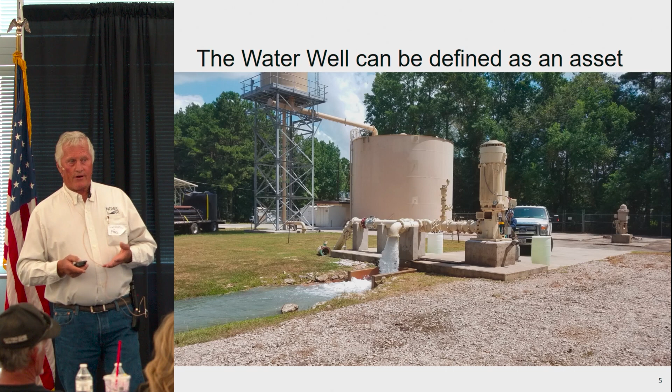So when we look at the water well, it can be defined as an asset, correct? The water well is an asset. But the aquifer it produces from is also an asset. Without the well, we can't get the water out of the ground, so the water has less value if we can't bring it out of the ground. So the groundwater is an asset, and the well is an asset.

Groundwater, a lot of people think it's there indefinitely. Wrong, it's not. But as long as there's water in the ground, we have groundwater. The well has a shorter life cycle than the groundwater in most cases, unless you're in the Ogallala. Then you can say the groundwater's probably got less of a life cycle than the well.

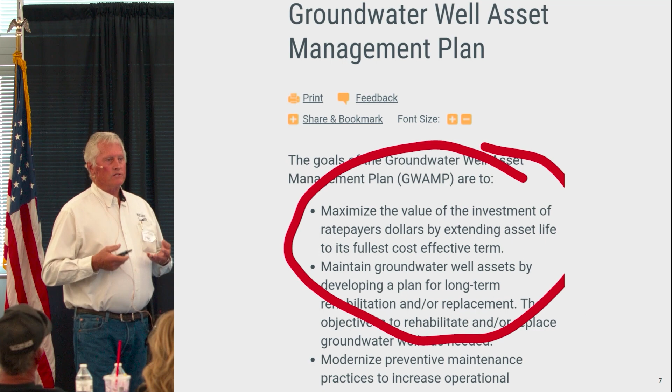But everybody's starting to see value in managing their groundwater. They used to not really manage it, they used to mine it. Today we're starting to try to manage it more than being a mining industry, pulling it out faster than we're putting it back in. We're starting to look at that because we know that once we run out of it, the communities will dry up. We have to maintain a long-term value to our constituents and for survival.

So to be a long-term groundwater asset, that involves much more than just installing a well. There's a lot of things that go into making that groundwater and the well a long-term value. One of them is the water quality. If we don't have good water quality, is the groundwater an asset? It might be there, but if it's not taken care of and the quality's bad, can we consider that a long-term asset? The answer is no.

What's that? I say dirty, it's wet. Yeah, it's wet, but it's not much of an asset.

A lot of times, it's things that we do that make that less valuable. If we contaminate that aquifer, it's less valuable than it used to be. So if it's naturally occurring, that's one thing we have to deal with. But we want to make sure that we don't degrade the value of that asset.

Also, we've got to look at the water quality or quantity. Is it abundantly sustainable? Is it replenished every time it rains? Or are we in a confined aquifer and are we lowering that water table? Are we using that water faster than we're putting it back in?

Most of the country, most of the world actually, has a declining water level. So we're pulling the water out faster than we're putting it back into our deeper aquifers.

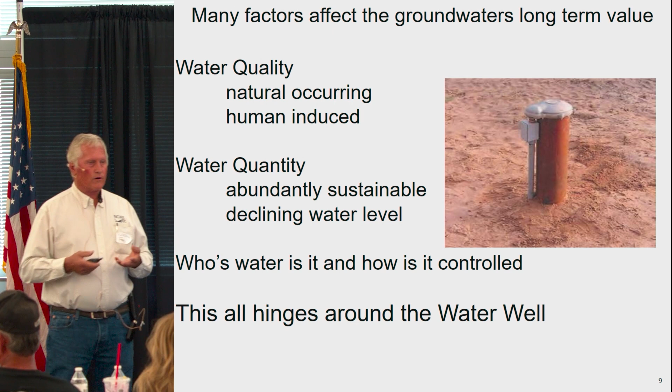But everything that we do with the groundwater hinges around the water well. Just about everything we do, either the water well or the injection well or surface contamination or something, but most of it's the water well.

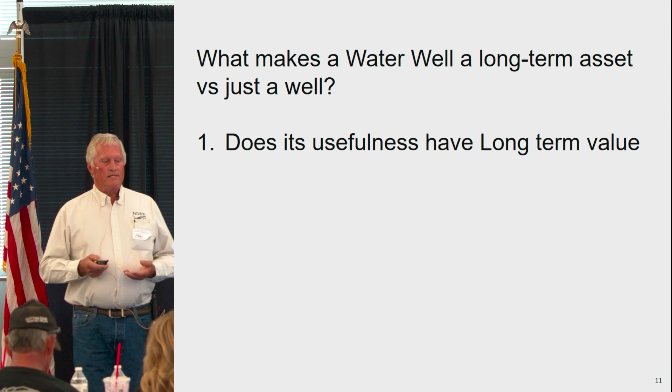So what makes a water well a long-term asset versus just a well? You drillers make it a long-term asset. You water well professionals make it a long-term asset. I like to say that it has to have usefulness that has a long-term value or a long lifespan.

And we should make every well like a Cadillac. Why would we make a well lesser than optimal? We want to make it like a Cadillac. We don't want to make it like the Yugo.

The Yugo was the worst car ever made, some people think. I don't know if it was, because I don't know every car that was made, but did you have a Yugo? No, I just wondered why it was worse. I never had one either. I don't know if you can even find a Yugo distributor in the United States, or if you could get it worked on very well, because there weren't very many sold, but you can't find one on the road hardly today. I know a few people had one, and the reason I know is because I gave this presentation in Colorado, my second presentation, and a guy stood up and said, 'My son drives a Yugo.' I'm like, oh, crap. But then he sent me a picture of it. That's his son's Yugo. He needs to take better care of it. No, he did take good care of it. It's still running, it still looks good. Yes, the Yugo cost less to buy, but what did it cost him to drive it? It wasn't an expensive car.

It was very inexpensive, almost like a throwaway type car, kind of like the Chevette, or... not the Mustang, take that back... the Edsel, or there was another one, Ford had one, the Pinto, yeah, the Pinto. It was kind of like them. You don't see them today. For 20 years, yeah, it was great. So, yeah, he had one. You can see almost everything on it's been fixed. I talked to another guy, he said, 'Yeah, we had one,' and he said it's readily available, obviously, the junkyard. When he closed the door, the handle came off - right after he got it, closed the door and the handle came off in his hand. So they were a cheap-made car.

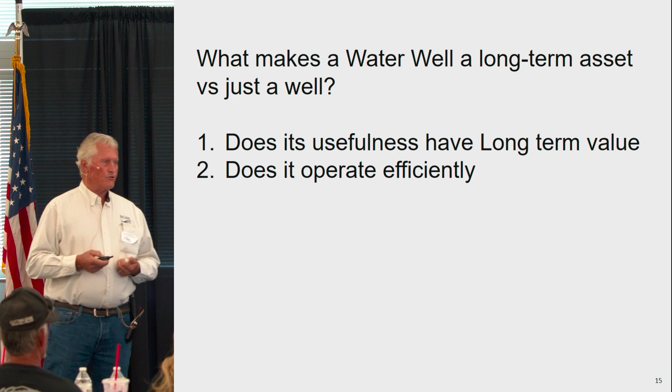To be a long-term asset, does it operate efficiently? Did the Yugo operate efficiently, or did he have to do maintenance on it more regularly than on a Cadillac? Does it require frequent service? Does your well require frequent service? You got it installed—does somebody have to go out there every couple of years and do something to it? Maybe it's plugging up, maybe the pump has issues. Or when you walk away, is it good for 5 or 10 years without anybody looking at it?

I know there's a lot of well owners that don't even know where their well is because it operates efficiently. We had a call one day where somebody wanted us to come out and look at their well because they had a problem with it. We went out, looked, couldn't find the well. Come to find out, they were on city water, and they were working on the system—that's why their well wasn't working. But they thought they had well water. Normally, we see it the other way around—people think they're on city water and end up being on well water and out of water. But this was the opposite.

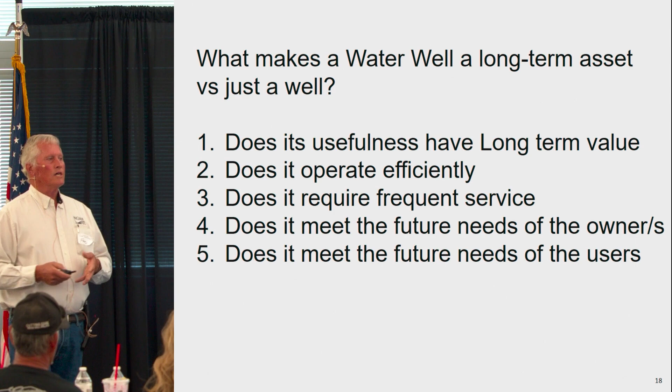Does it meet the future needs of the owners? Does your well meet the owner's needs? When he specified he wanted a well drilled, he probably told you why he wanted it, what it was going to be used for. So you build it to meet his needs. But then he's got to use that water to supply his customers. Does it meet the customer's needs? So again, does it have a long-term asset value to the user, not just the owner?

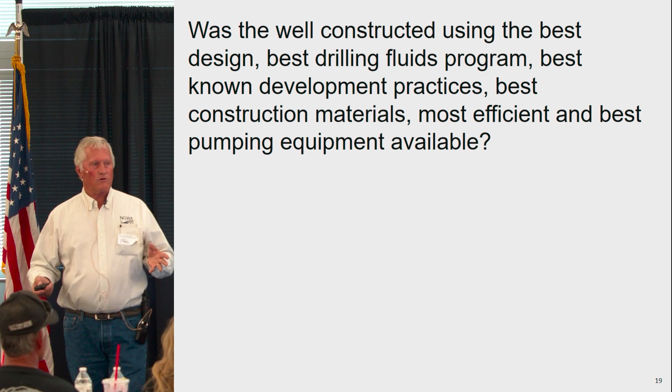Was the well constructed using the best design, the best drilling fluids program, the best known development practices, the best construction materials, the most efficient and best pumping equipment available? Did you use all that when you planned to construct your wells? Or was it constructed using a lower cost design because you're trying to save your customer money? We do that often, don't we—with questionable drilling fluids programs, or maybe no drilling fluids program at all. I was a drilling fluids engineer, so I look at that all the time. What are you doing with your drilling fluids program? Is it a good one, or are we plugging up the formation?

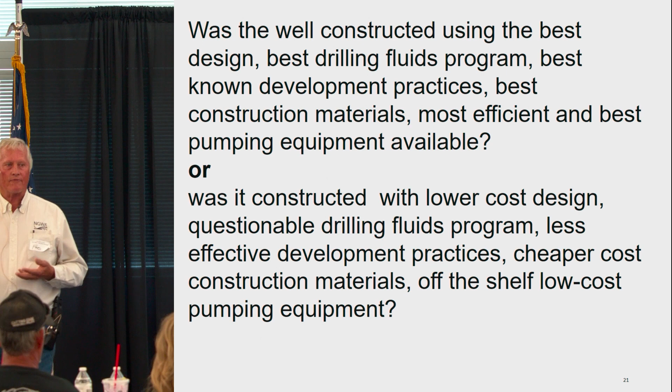Did you use less effective development practices, or are you just using one because that's the tool you have? Is it the right tool for the job? Are you looking at cheaper costs in construction materials? Maybe what you're using is cheaper than what somebody else is using, but you're putting it in because you're trying to keep the well cheap for your customer. Or using low-cost off-the-shelf pumping equipment from Home Depot or Tractor Supply that's not going to last as long as a Franklin Electric built motor and pump? Look at what you're using. Does it really make the best sense for long-term value? Is it going to last a long time, or are you building something that's going to require somebody to come out and repair it in a few years?

Where sacrifice is made—and this is what I said—sacrifices are made. Our company makes sacrifices. If something goes wrong on the well, we have to figure out what's the best solution for us and the owner. What's going to make the most sense in remedying a problem. A lot of times we have to sacrifice because they don't want to pay the extra cost involved to do something that you didn't know—you didn't expect it when you went in to drill the well.

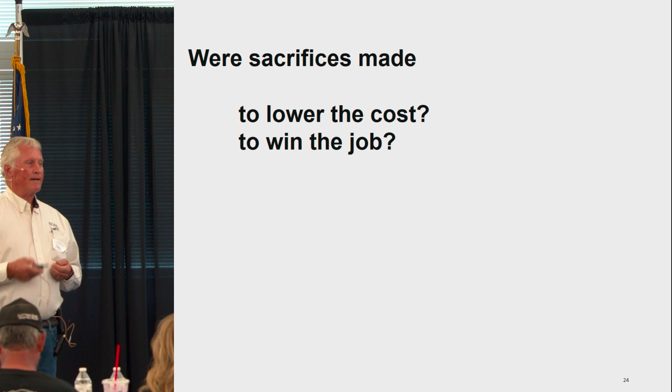There may not be any records you can use to know everything about what's going on, and you lose circulation or you hit a fracture or a fault. Something happens—did we do the best that we could? Normally we do the best we can with the materials we have and the money that's available. But is that going to give us that long-term value? A lot of times, to lower the cost, we want to do things that lower the cost for our customer. We want to do things to win the job. Can you guys go out and name the price you want to drill a well for, or do you have to be competitive?

Most of us have to be competitive. We bid a lot of our jobs. Most of our jobs are municipal type jobs, and almost every one of them is either bid or negotiated. And if you negotiate a job, you still have to be very competitive.

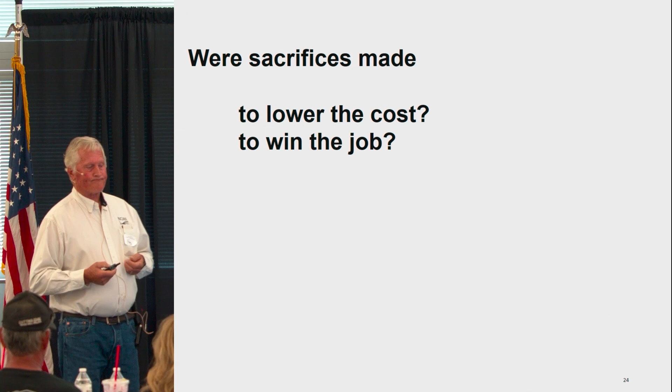Or are you hurrying to get to the next job because you're behind? Today, most of us are behind, so we're trying to get done to get to that next job because we have a commitment. We said we'll be there in 30 days, but this job's taking 60 to get done. We're trying to hurry up and get to the next job.

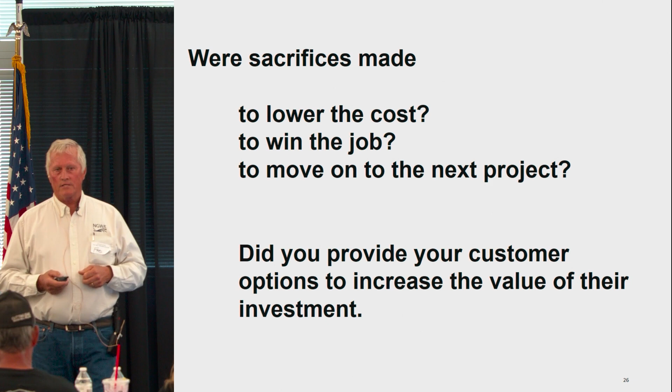Did you provide your customer with options to increase the value of their investment? Maybe the owner told you what he wanted, but for a little bit more, you could give him way more, quite a bit more. I don't want to use the word upselling because it's not really upselling, it's providing increased value. Did you talk to him about how he could increase the value of his well?

This is one of my pet peeves here. Can you hand me that blue book behind you? Most states, when we look at their rules and regs, let me see if I can do it with this one, I can do it with the pointer I guess. Now I gotta go back. There, that thing right there.

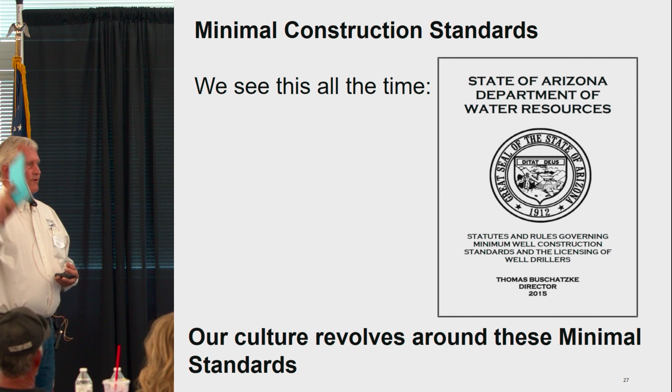Most states have minimum well standards. Minimum well construction standards is what is on the front page of their rule book, right? I'm looking at the state of Utah. It doesn't say minimum standard. Thankfully, it doesn't say that.

Because what are we teaching our kids? What are we teaching the young guys in the industry when we have minimal standards? Do minimum work. We're teaching them that all they have to do is meet that minimum, and nobody's going to say anything. And if we're striving just to meet the minimum, what happens? We're going to fall short somewhere, right? We normally fall short someplace in that job. And if we're just trying to meet the minimum and we fall short, now we're not meeting the minimum.

But if we teach them to exceed that minimum, to do better than that, then maybe when they have a shortfall, it's still above and beyond somebody's expectation. So I don't like to see the minimum standards written. Now, there are some places in Utah's book that talk about the minimum wall thickness, the minimum this and that, but it's not very often. Where in some rule books, it's almost every page you find minimum standard, minimum for this, minimum for that. We need to try to do better when we're building our wells instead of saying this is the minimum.

I know firsthand, I used to be the manager for the Rocky Mountains for Hydro, and we've had four managers, I think, since. I always tell them, we're going to get in trouble, guys. Well, why are we going to get in trouble? We're meeting the minimum. Because one day we're not going to meet the minimum, and lo and behold, boom, we don't meet it.

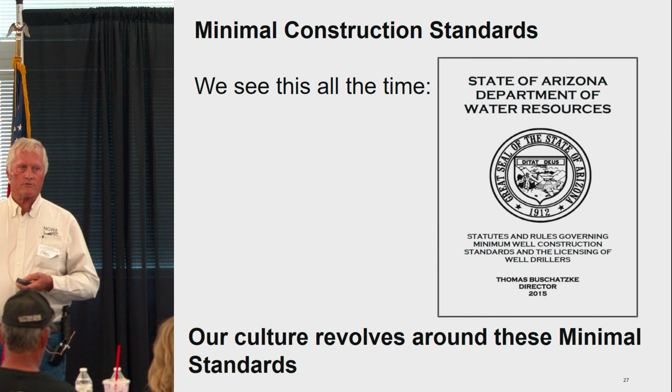Because we want to make sure that we don't try to fall, or don't ask to fall short of that minimum. So we're trying to raise that bar. Everybody should try to raise that bar a little bit. That's one of my pet peeves, is that minimum standard that I see. Colorado's got it, Arizona's got it, New Mexico's got it. Just about everybody has that on their cover sheet.

We see it all the time, and we see it in the bid specifications all the time for when we're bidding wells. Meet this minimum standard, I don't like that. Tell me what you expect, give me your high expectation. Let us strive to get that high expectation, not a minimum. But our culture does revolve around minimal standards, and I'd like to see our culture changed. This is just more of that same thing, more of it, cement grout, surface seals, you know.

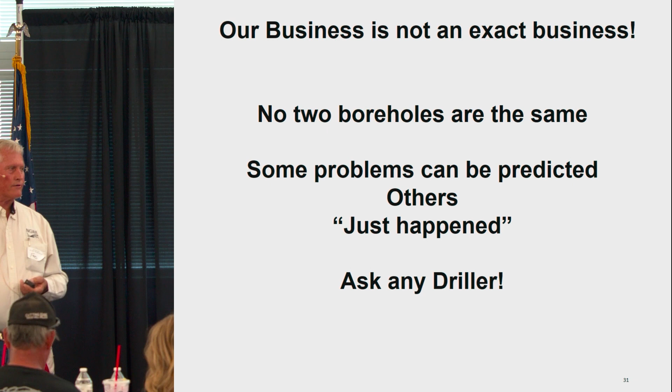Our business, it's not an exact business. There's not two wells that we drill, I don't care if they're 50 feet apart, that are the same. They're not going to drill the same, develop the same, or pump the same. They're not going to give you the same GPM unless your pump only gives you 15 gallons a minute and you've got two pumps in the ground. This one might give you 35 if you had a 35 gallon a minute pump, but both might give you 15 the way you got them set up. But the two wells are not going to operate the same.

Two boreholes are not the same either. Some problems can be predicted. Others just happen, and you can ask your driller why this took place and the answer is it just happened. Well, most of our problems are predictable. Not all of them, but a lot of the problems we see when drilling a well are predictable.

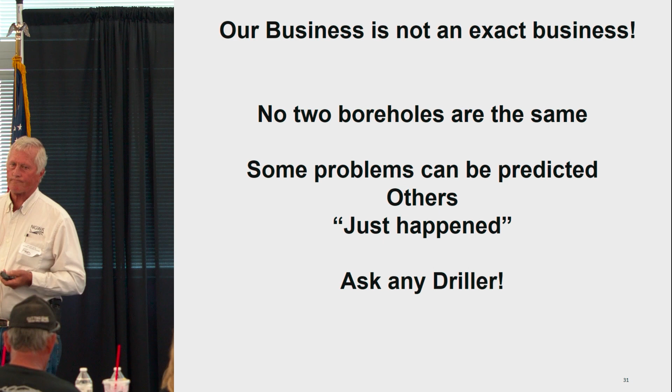This is right down here at Orem. We're drilling for Central Utah down here. This was a few years ago. I believe this is the third or fourth well we drilled for them. Large diameter, 20-inch completions. Screens, there's about 400 foot of screen in these wells. Blank on top, a lot of boulders, very unconsolidated.

Kyle got to develop these wells. I think he loved that, developing them, because they developed pretty good, didn't they, Kyle? The most efficient wells in the west here that I know of. Yep, some have a capacity of 800.

But they were challenging, and we knew going into this project they were going to be challenging because we looked at all the records available. And there was a lot of records available showing how unconsolidated, how much boulders and gravel and everything there was. And I think for that reason we got the job, because I think some people were afraid to bid it.

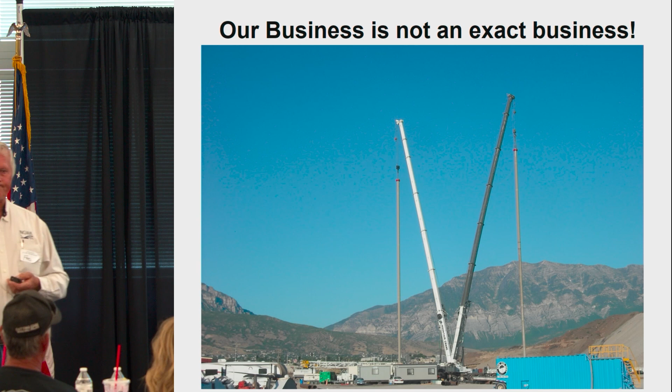So we got it, and we had a tool pusher, and he was a pretty good tool pusher out there running the rig. But we got ready on this one, I think it was the third or fourth, I can't remember now. We're running our screen in, and he stacked out just shy of hooking up his blank. He was still running, I think, the last jointed screen, and stacked out on a boulder.

Remember that? Yep. So it's like, okay, what are we going to do? Lo and behold, he was already getting chewed out by the office, because he was supposed to run a barrel reamer, since we had to do that on the first well, second well, third well. But because we never had any problems running screen and casing on them, he didn't run the barrel reamer on this one, which would have told us we had a nice clean hole all the way down, since the barrel reamer was the same size as the screen.

It's long, almost like running a dummy in a well. He didn't run it. So when he stacked out, we had to use a crane, because the screen and casing is heavier than our rig would set it. So let me see if I can...

Does this have a pointer on it too? No, got to use the mouse. So what we have here, there's 200 feet of screen right there. This is not wire wrap, this is Roscoe Moss louver. There's another 200 foot of screen, actually one joint short of 200. This one's got 200 feet.

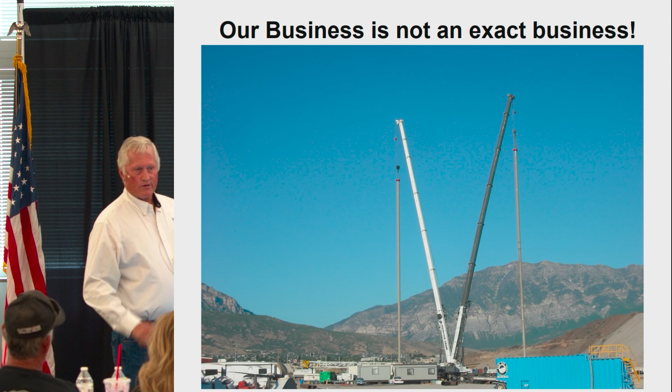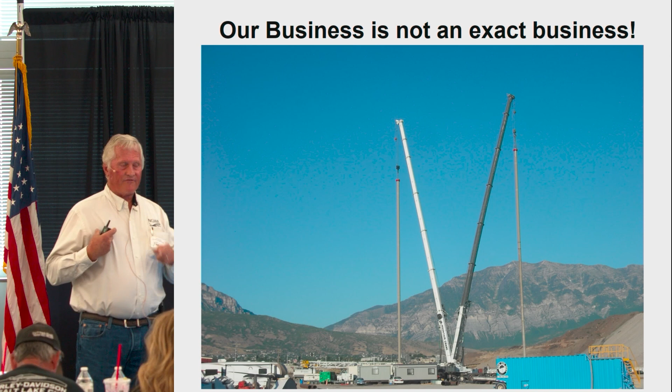So that's thinking. It's kind of the art that goes into well drilling and well construction. I think he did the right thing as the second thing he did, but the first thing, not running the barrel reamer, that was a mistake. Because had we run the barrel reamer, he probably wouldn't have finished any sooner, but he would have still saved crane time.

But much of what we do involves both an art and a science. Based on good science, we can understand the need for good groundwater management and proper well design and construction to meet these needs.

So it doesn't start with the well driller. It starts with planning. When somebody says I need a well, it starts clear back there with the planning. You've got to look at the science, look at all the records that are available. We have to look at everything available to find out what it's going to take to drill in this area.

What can we expect out of the water, or out of the formation? Is it going to give us good water, or is it not? We don't need to drill a well if we're going to have injurious water. We want water that we can drink in most cases.

But how we do that is all part of the art. Because I can build a well 100 different ways, and the outcome's not always going to be the same. But I may be able to construct a well 5 or 6 different ways with the same outcome.

So we can choose to use the science and all the formation or information available to plan a proper well construction plan, or we can hope to be lucky.

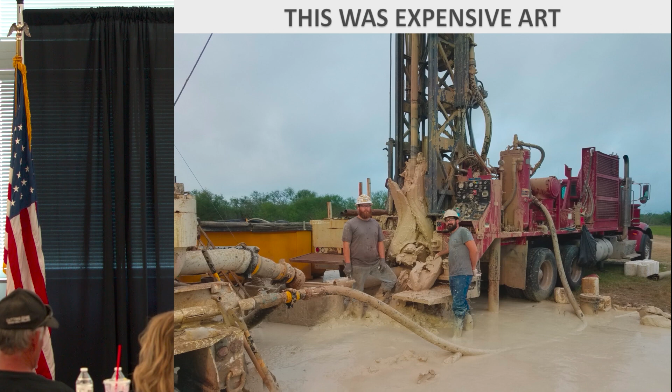But that's expensive art. It's an expensive lesson, because somebody didn't do their due diligence bidding the job on our part, and they opted to go ahead and drill it conventional. And it wasn't them two guys' fault. Them two guys worked their butt off to get this job done.

So well construction, the processes that we use and the materials which we choose to use, all have a direct effect on the value of that asset or that long-term asset. We do have choices when we're drilling wells.

From the well design, and again, it starts back at the well design for engineers in the room. Have we designed the well to maximize the yield, to keep the sand out, with material selections, best findings, the latest developed materials, to meet the water quality concerns?

Are we using the right materials to meet water quality, or are we using something that, our logger was just talking about running pH. He could tell that water is going to be oxidizing, or if it's going to be corrosive. That's something that's nice to know on these bigger wells, so that you can design your materials so it's not going to be oxidizing.

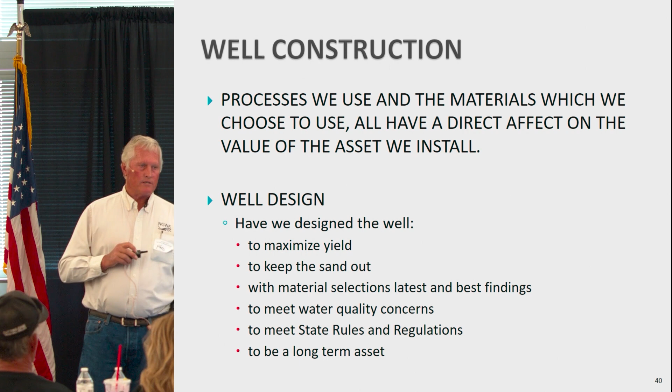Are we designing it to meet state rules and regulations? And more importantly, are we designing it to be a long-term asset, or are we just designing a well to get water to our customer today?

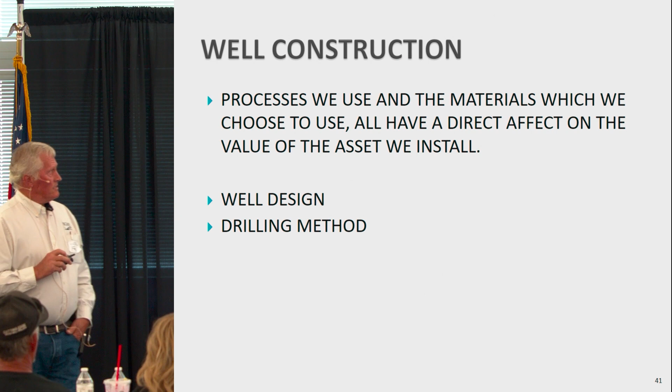What drilling method? There's that picture. We had the wrong drilling method when we drilled that well down there in Refugio. Is it going to be conventional circulation or reverse circulation? Is it going to be air, or is it going to be water?

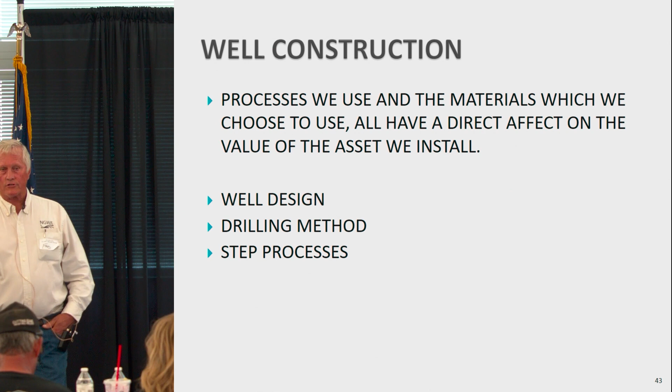What step processes are we going to use? Again, there's a ton of different processes that we can use. And you guys probably have the process that works the best in your area. But if you're going into a new area, the processes that you use may not be right for another area. So it'd be nice to know what others in the industry, and I don't like to look at them as competitors, I like to look at them as the other associates within our industry, are doing. What works best in that area?

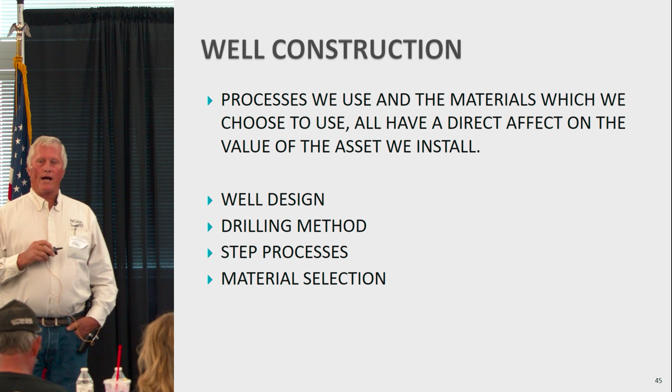From drilling to fluid management to development, they're all important. What materials are we using? Are we using PVC, stainless steel? Are we using low carbon with copper bearing pipe? HSLA from Roscoe. And when we use the stainless, there's many different grades of stainless, from 304, 316, duplex. What materials are we using for that to make that a long-term value?

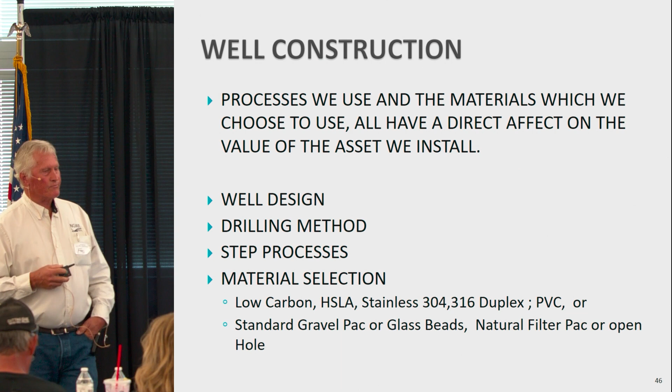And what are we using for gravel pack? Is our gravel pack going to be degrading as we pump water through it, or is it going to be there in 100 years? And that's why we're moving into the glass beads, because we think they're going to last longer, but they're more expensive up front. But over the lifespan of that well, maybe glass beads are going to be cheaper.

What operational practices are we using? We need to look at that. And then we also need to look at our scheduled maintenance.

Today, everybody's got one of these things on their hip, right? Or in their pocket. What are they called? Time wasters, huh? Oh, they're a smartphone, right? Why are they called the smartphone? Because you can almost Google anything, right? You can look up so much stuff.

Now, when I started, when you started, I could go around the room. Many of us didn't have a smartphone when we started. We didn't have a telephone when we started. There was no such thing as a mobile phone when we started. Okay? We had to learn out of a book. We had to learn from somebody else. When you got home at night, you called somebody that you thought was smarter than you to ask for advice.

Today, people can get on their smartphone in an instant and try to get out of a problem. Or they can call somebody in an instant to get out of a problem. We need to be using them resources for that. We need to be learning. With all the technology we have, there's no reason that we can't learn what's best, what works best.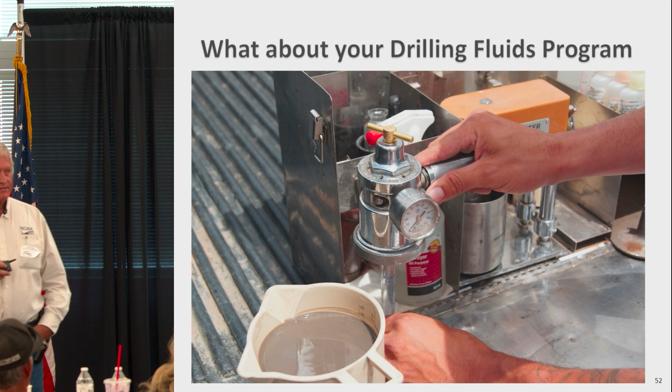I always like to ask, coming from the drilling fluid side of the business, what about your drilling fluids program? How many of you guys use drilling fluids in this room? Just one? I wouldn't get very rich working with you guys, would I? I'm sure more of you use drilling mud or drilling fluids than the one I got a hand from. But I like to say, what about your drilling fluids program?

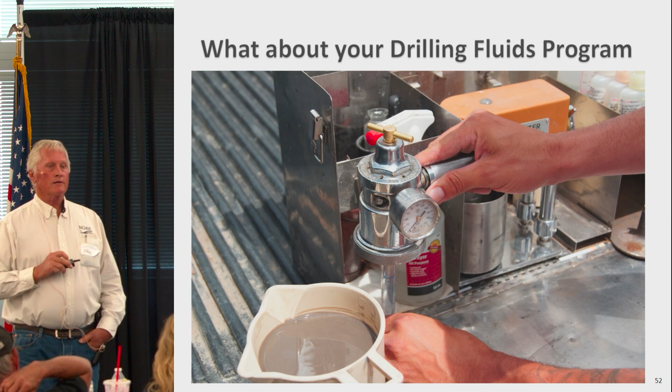Because your drilling fluids program can either make or break you. It can make or break the efficiency of that well. What drilling fluids products are you using on your wells?

Now, these here are three PAC materials that we use for fluid loss control. The one on the left is a readily dispersible product. I put it in water, and it readily disperses into the water phase. I don't get fish eyes. I don't get clumps in my drilling fluid.

Those clumps that you get when you mix mud, whether it's clay or polymer, are dry material surrounded by water. They go back into the formation, and they're hard to break down and hard to get back out.

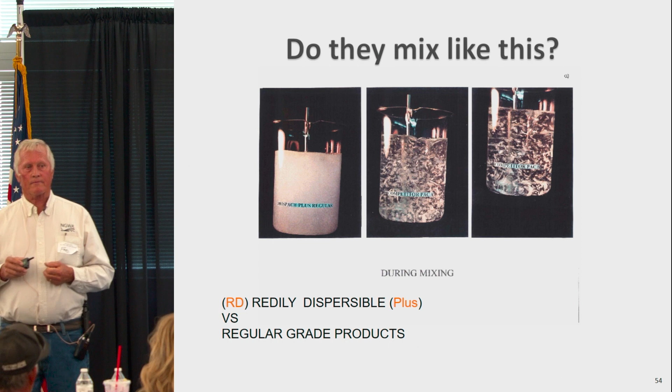So you want to make sure that you use a product that mixes well, with a hopper or some shearing mechanism. When you mix your mud, you don't want to just throw it in and send it down hole, especially if you're in the aquifer, because you don't want raw material getting back into that aquifer.

This is what it looked like 5 minutes after it was mixed. Material settled out of the ones that were not readily dispersible. The one on the left, which is readily dispersible, stayed in solution. We ran it across the screen and filtered out a lot of the material that did not go into solution. But a lot of it went to the bottom too, that we never filtered out.

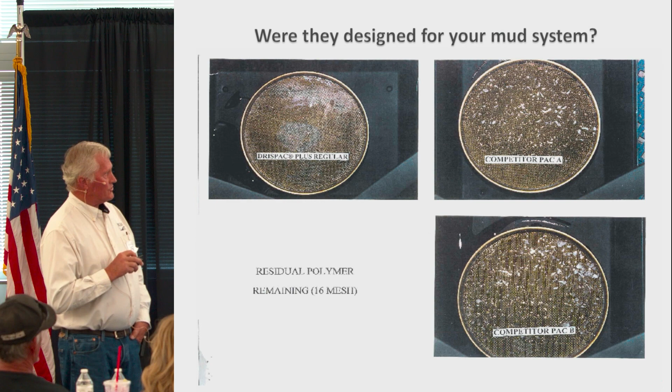That filtered out material, what is that? For you, if you're the driller or the owner of the drilling company paying for it, it's thrown away money. If it goes across that screen, you just lost the benefit of that material, so you're not getting any value. If it doesn't go across that screen, it's plugging that formation, so now the well owner's not getting any value out of that well. He's losing efficiency. He's losing production capacity out of that well because you didn't have good shearing capability or the right materials for your well.

Another reason I ask what drilling fluid products are you using, are they NSF? Anything that you put in the water well should be National Sanitation Foundation approved. Why is that? Why do we want NSF material? To keep from contaminating your fluid and the groundwater.

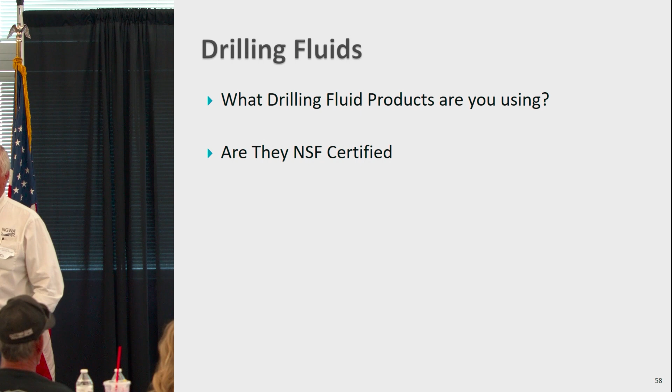In the past, before NSF became an issue in 1985, we weren't concerned about contaminating the water because we didn't even think about what we were putting in the well as being a contaminant unless it was oil, diesel, or some hazardous chemical. But we didn't think about lost circulation material being hazardous.

But it is really hazardous — the lost circulation material, if it's organic, has to degrade downhole, and it's going to start growing bacteria. Then that degrades the quality of the water. Cottonseed hull, cedar fiber, hay, straw, paper, all those things — we don't want anything organic to go into that well, from the polymers to your lost circulation material. Nothing organic should go into our water well. And if it's organic, it won't pass as NSF.

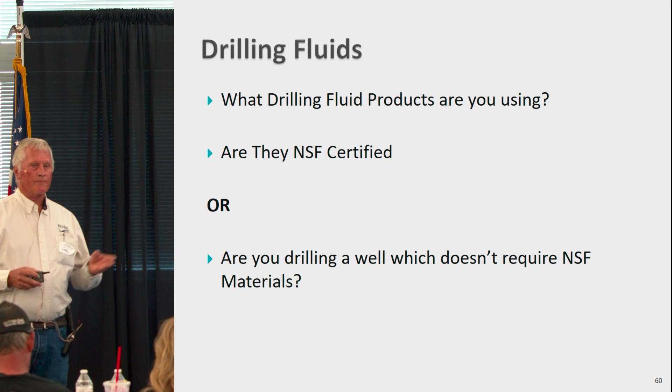But a lot of people are drilling wells that don't require NSF. They don't require National Sanitation Foundation approved products because the regulator in some states says, oh, you're drilling a stock well, a dewatering well, an oil well, something other than a domestic water well or municipal water well, so it's not important what you use. Believe me, I'm going to show you why it is in just a little bit.

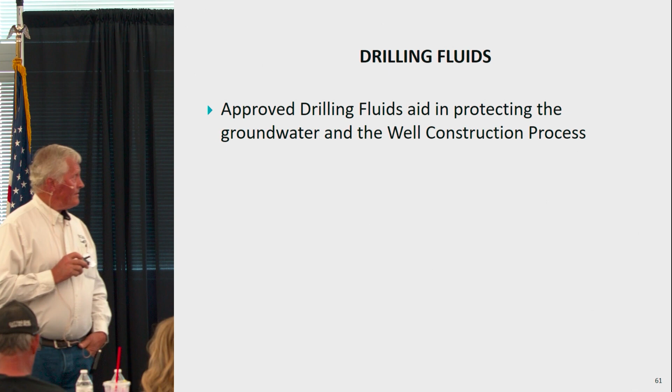Approved drilling fluids aid in protecting the groundwater and the construction process. Improper drilling fluids can contaminate the aquifer, lower the efficiency, and cause premature failure and decommissioning. If we use raw material, we're not providing a high quality asset to the owner — we're giving him something much less. And we never thought of it in the past. We never thought we were doing anything to degrade that water quality, but we used to be.

Now, who says the products don't need to be NSF? In some states, it's our regulators. Jim, every well here requires NSF, doesn't it? I'm trying to think — every well in the state of Utah, I believe, requires NSF material.

More states are actually starting to jump on this, and I don't know if it's because I've been hounding them or somebody else was hounding them, but a lot of states are starting to come around saying, I don't care what kind of well you're drilling, you need to use NSF material.

But they still omit the oil field. The oil field can drill through that water zone with oil mud. Nobody says anything because they're going to case that aquifer off. Well, what did they use when they drilled the aquifer?

I don't care if they're going to case it. What did they use when they drilled through it? They use mud that's not NSF. They use products that should not be in a water well. And we're seeing more and more lost circulation within our aquifers. They're drilling through that, losing circulation back in it, then they're casing it, and nobody cares, except for Fred.

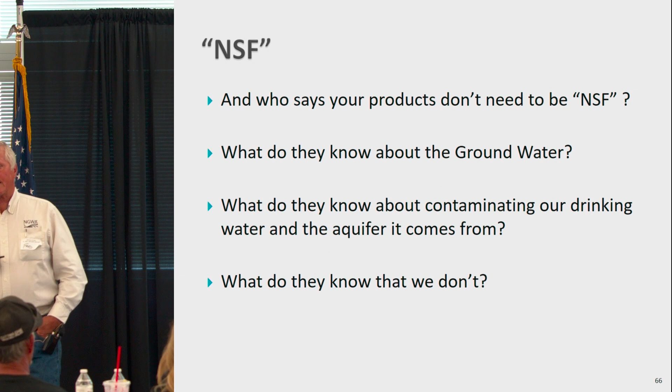We look at rules and regs like these right here, 2022, July. Why do we have new regs? Jim did a good job explaining why we got new regs, because he was kind of forced and mandated to make new regs. But why do we normally come up with new regulations, new rules?

Because somebody was naughty. Huh? Because somebody was naughty. A lot of times that's true. What did I hear over here?

Because you're always trying to improve the process. And we're learning as we go. We're learning from back when the first well was drilled to the wells we're drilling today. We're learning more and more as we go. And so rules are made to protect the groundwater.

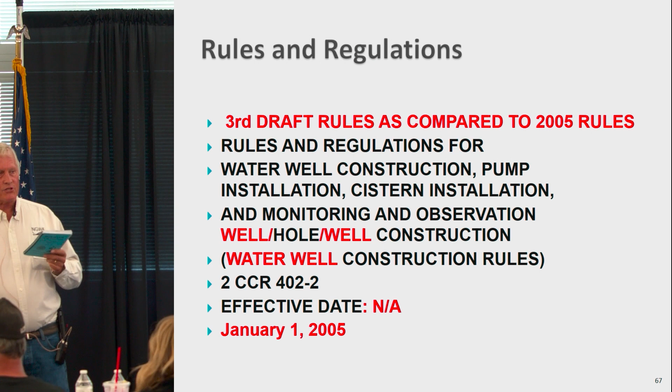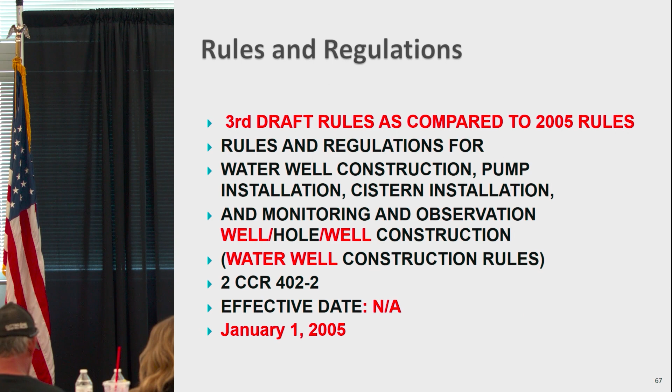And I know nobody in this room likes new rules. Even Jim, I bet, doesn't like to make new rules. Well drillers and pump installers hate new rules, but they're there to protect the groundwater. They're not being written to make your life more difficult, to make you change your equipment. Yes, it might require you to change your equipment because of the annulus size or something, but it's made to protect the groundwater.

So you know what it takes to protect the groundwater better than the customers that you're serving, better than most non-groundwater professionals, even though you're groundwater professionals, better than many regulators. We have a duty as groundwater professionals to convey this knowledge. We need to be teaching.

And every one of you in this room, believe it or not, is an educator. You're out there educating the well owner on what he needs for a pump. You're out there educating the well owner on what he needs for a well. If you understand the rules, if you understand what works best, if you understand the protection that is required to protect that aquifer, you're teaching. You are an educator.

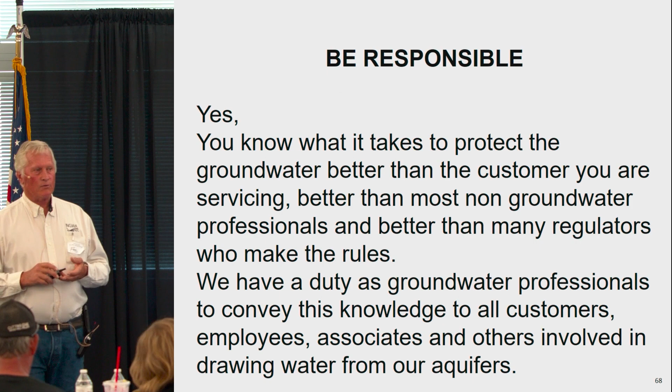And I think everybody in this room is an educator in one way or another. So we have that duty.

And maybe drilled in a cow pasture. Most of us that drill have drilled in a cow pasture, or we've drilled in some kind of cropland, right? And when we drilled in them, if you're my age and you were out there drilling, you probably did things that you wouldn't do if you were drilling next to the house or drilling a municipal well because it wasn't required.

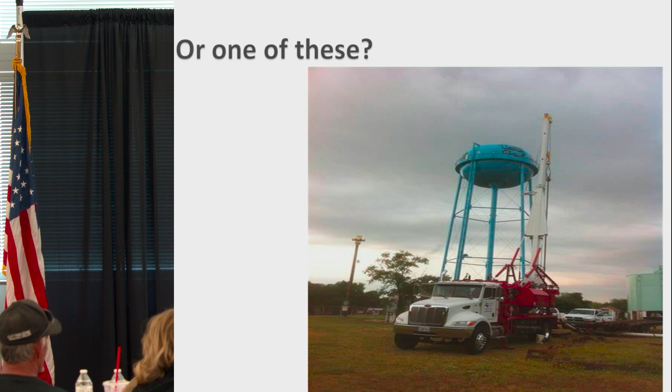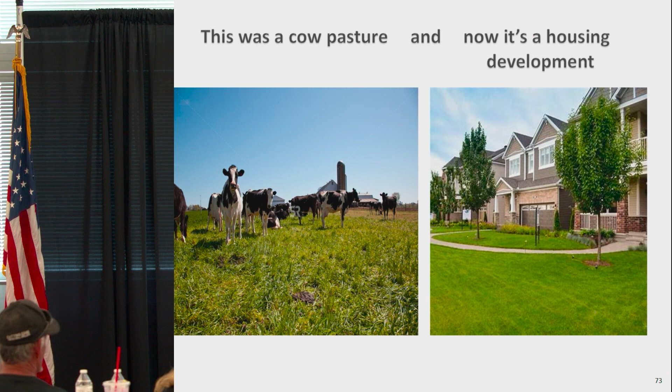We've talked about this just a little bit ago. Things weren't required for us to drill out in that cow pasture or that cropland. But now that cow pasture is a housing development, and they've got a well that provides water to all these constituents.

The cornfield is also becoming an up and coming community. It requires water from out in that cropland. If we contaminate that cropland, what's the quality of that aquifer? What's the quality of the well and the water it's pulling from? Did we degrade it? Did we hurt it over the last 50 or 100 years? Possibly we did, because we didn't know better and because it wasn't demanding the same amount of attention as one for municipality or a domestic use.

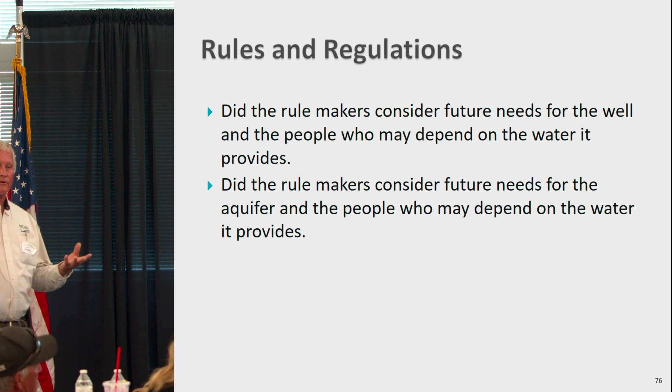Did the rule makers consider the future needs of the well back when they wrote the specs? Probably not. Did they consider the needs of the aquifer? Probably not. There was plenty of water there originally, but now we're pulling that water table down. The water's becoming more injurious as we pull the water table down because there's higher constituents, more contaminants, in the bottom of the aquifer than there is at the top. And then we're also feeding fertilizer and pesticides and bacteria from other wells that we drilled into that same aquifer.

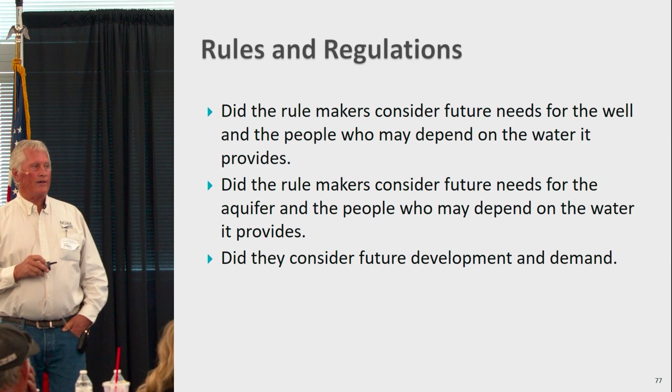Did they consider the future development and demand? Surely not, because I didn't. We drilled some wells in Colorado, and it took us about 35 minutes from town to get there, or from the last house to get into where we drilled the wells. Today it takes about an hour to get there, driving through the development, and the wells are right next to houses. I never thought they'd be putting houses back where we were drilling, but they did. So the answer is probably not. They probably never thought about these things.

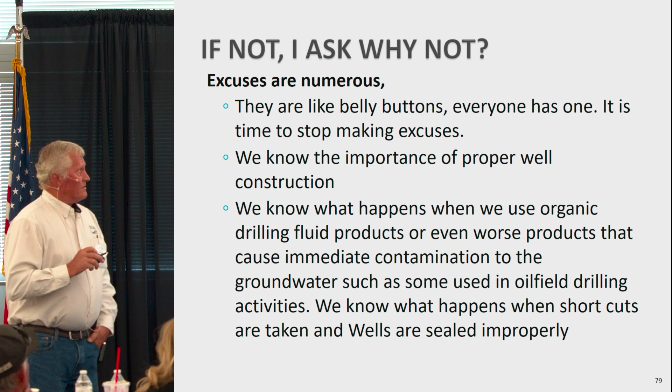Today I think more of us are starting to think about things, but excuses, when they make excuses, are like belly buttons—we all got one, right? We don't need excuses. We need to make change. We need to see change. We need to start being more diligent in protecting our groundwater.

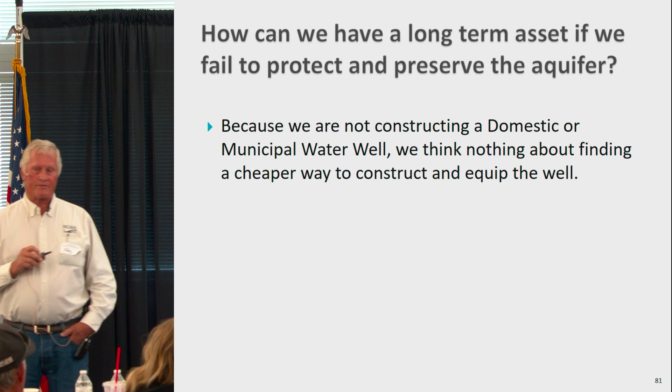How can we have a long-term asset if we fail to protect and preserve the aquifer? We can't. If we don't protect it, we're not going to have a long-term asset. But because we're not constructing a domestic or municipal well, a lot of us are looking at cheaper ways to construct and equip it. We shouldn't be looking at a cheaper way just because it's not highly visible. Regulators may not require all wells to be protected, but it's our duty to do that.

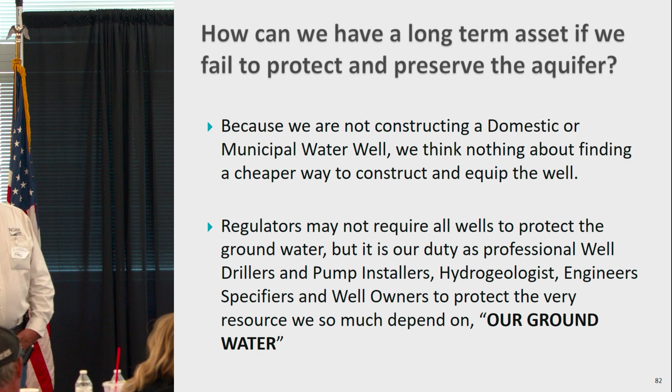In California, there's a push to convert old wells to drinking water supply. It's not just California—you're probably doing it here in Utah too. We're doing it in New Mexico. We're doing it in Colorado. They're trying to take these old irrigation wells and make them municipal because they need more water for the cities. A lot of the times we can't do it because the well construction didn't meet the criteria for a new well design today.

We can't confirm what kind of surface seal we got, what materials were in it, what it was drilled with. There's a lot of reasons we can't use the majority of the wells they want to convert. Once we start looking at them, it's like, nope, that well's got to be re-drilled, plugged and abandoned, moved over. In a lot of cases you can't do that because now there's houses there—no room for the real estate to drill a new well.

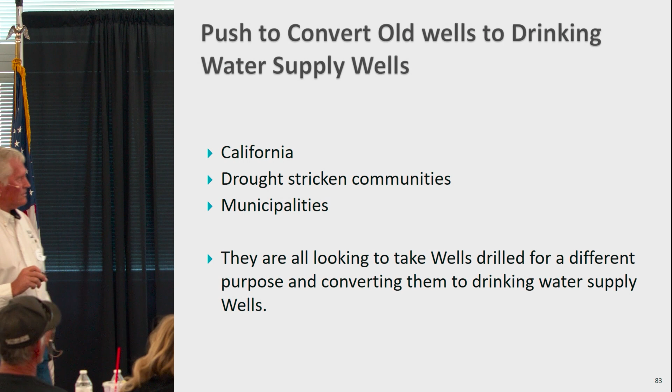Again, construction failures, sometimes bacteria. A lot of these wells, the water quality is just not there. Maybe the farmer was putting something down the well to clean it up that was actually contaminating it rather than cleaning it up. Some of them you're just unable to deepen—too small diameter. We're seeing a lot of premature failures on a lot of these wells, and again, they just don't meet the specifications for a municipal well.

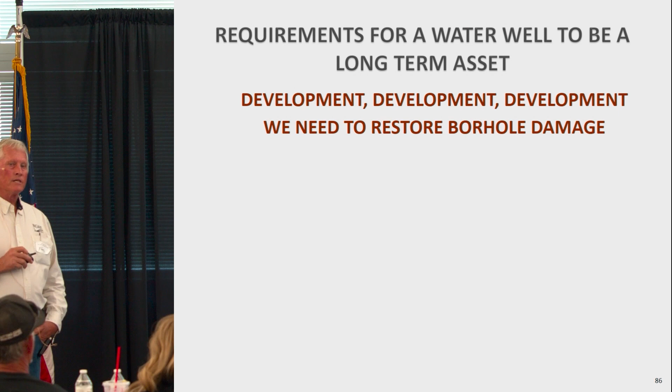Requirements for a water well to be a long-term asset—we need to look at development. We need to restore that borehole damage that we caused when we drill a well, and that's if we do the best job that we can. Maybe if you're drilling with cable tool, you might not have too much borehole damage, but if you're drilling rotary—air, mud, or water—you're going to have borehole damage, and we have to develop that damage back out of the well.

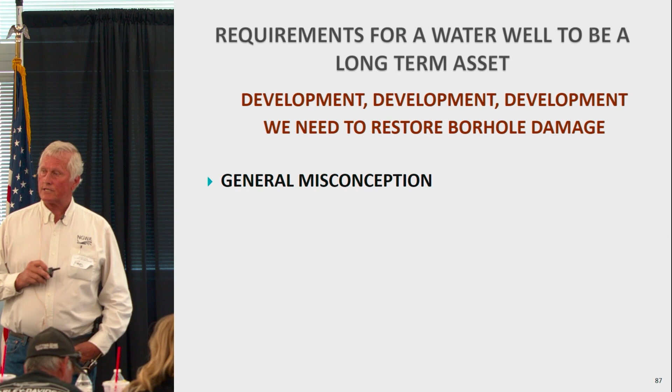Guess what the biggest misconception about development is? How long it should take. Bingo! Were you in my class before? Time.

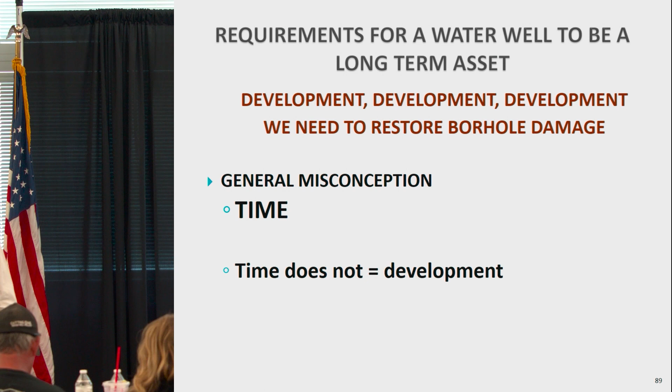Drilling a lot of municipal wells, what we see in our bid specs more often than not is you're going to develop for so many hours. It's time. Time is a misconception. Time does not develop wells. Time does not equal development. Anybody disagree with me? Assumptions are that development time is time well spent.

This happened to us out here too, in Utah. We were on a well that we were developing out here.

We were gravel packing, and we didn't get enough gravel in because the hole was pretty unstable. The gravels were real unstable. So we had to gravel pack with thicker fluid than we would normally use, so we had more viscosity. Then we didn't get all the gravel in.

So we said, okay, let's swab, and if we swab all the heavies out, we'll get more gravel. Well, they swabbed for 110 hours. We never got any more gravel in. Less than one bag, and these are super sacks, 3,000-pound bags. But we got less than one bag in.

That swabbing is also part of your development process. Spec called for 110 hours of development using a swab tool. Well, we already spent the 110 hours, but we're still about 30 bags shy of gravel pack. So they call me, because I'm their technical advisor. They call and say, hey, tell me what's going on. Did the engineer specify the wrong amount of gravel? And that's what you would think if you're 30 super sacks off.

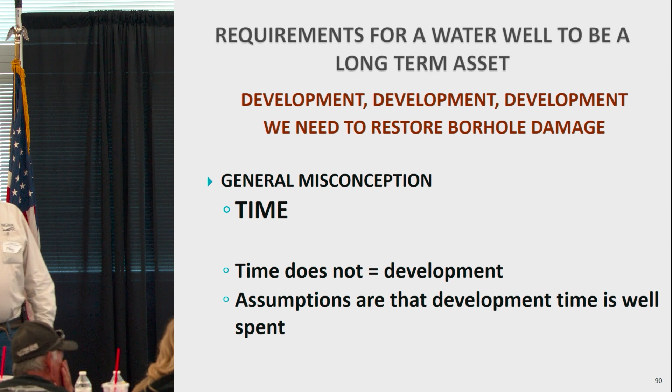That wasn't me. It wasn't me. Kyle's right, it was not Kyle. I wish Kyle would have been on the hole, because I don't think that would have happened. But the problem goes back to educating.

Nothing was happening. The first thing we should have done was pull it out of the hole and check it. But it even goes back farther than that.

The hand that built the swab tool was a new hand on the rig. He went to Tractor Supply and bought a horse mat because he couldn't find rubbers wide enough for the swab tool. He cut the rings out of the horse mat. Well, that's laminated rubber material that he was swabbing with.

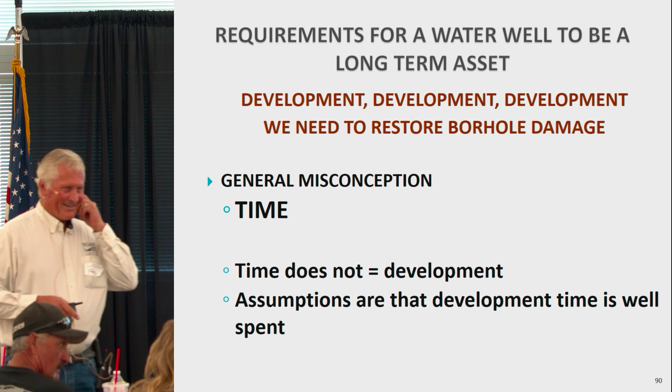So I guarantee it probably didn't last 2 or 3 hours. He didn't know though, because he wasn't taught how to properly build the swab tool. And hopefully it wasn't a used mat. No, it wasn't used. He did go to Tractor Supply, he didn't go to the farm down there.

So he swabbed for 110 hours. We probably wasted 105 of that anyway, of that swab time. So, time well spent. You can't assume that you're doing something, you've got to know.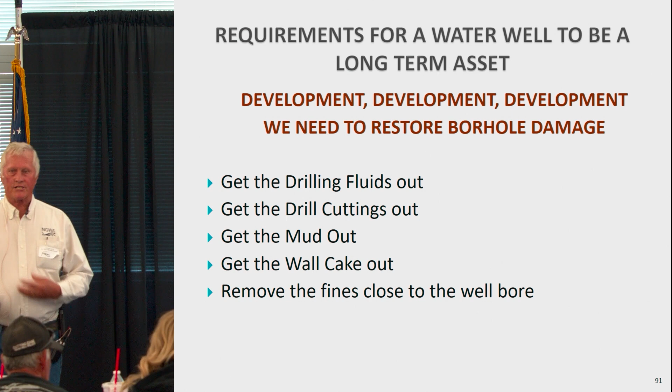You've got to develop to get all the drilling fluids out of the well. You've got to develop to get all the cuttings out of the well. You've got to develop to get all the mud out of the well. And when everybody thinks drilling fluids and mud are the same thing, no, mud is a combination of the formation and materials you're drilling with. You've got to get all that wall cake off the hole, remove that wall cake when you're developing, and get all those fines as close to the wellbore removed as well.

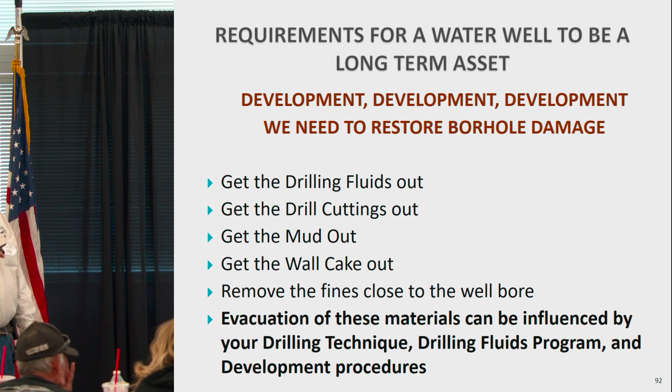So if you don't have any energy, you can't develop. Evacuation of these materials can be influenced by your drilling technique, your drilling fluids program, and your development procedures. So hours of development does not equal a good well development. You need focused, intense energy using multiple proven methods.

Our company loves airlifting. Well, most of the wells today, you cannot develop with just airlifting because the water level's getting deeper. We're going farther, and that air bubble coming off the bottom of that hole is very small, very minute. It's coming up, and it doesn't get to any size till it's basically out of the screen zone. It's not really developing the well. Back in the day, airlifting worked pretty good, but today it's being less effective all the time. So if that's all you're doing, you ought to incorporate some other method other than just airlifting.

I love Kyle's approach to development, using the cable tool rig, swab, surge, and pump at the same time, and measuring your results all the time that you're doing that.

You know what your baseline is that you started, you know what zones need to be cleaned. Kyle developed the right approach for developing wells. You need total evacuation of all the fluids and formation fines, not partial. If you only got partial, you've only got a partially developed well. It's not meeting its optimal...

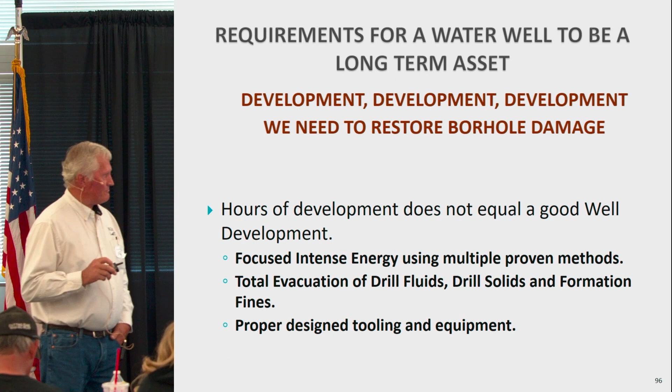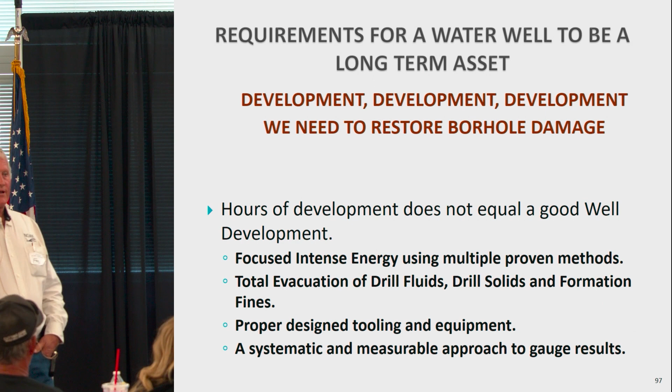A systematic and measurable approach needs to be done, and that's what Kyle does. He's measuring all the time. He knows at this setting I'm making so many NTUs of sand, so much turbidity at this interval. I'm going to have to go back and rework this interval as he goes to the next one, and the next one. So he's measuring or gauging his results as he goes.

This is a tool I really like. This is a double surge block isolation tool. If you don't have a cable tool rig, this tool works pretty well. And you can find this in Groundwater and Wells, 3rd edition.

How many of you have the Groundwater and Wells book? Several of you. Chapter 8, if you got the new book, the 3rd edition, I helped write Chapter 8. I'm an author of that book.

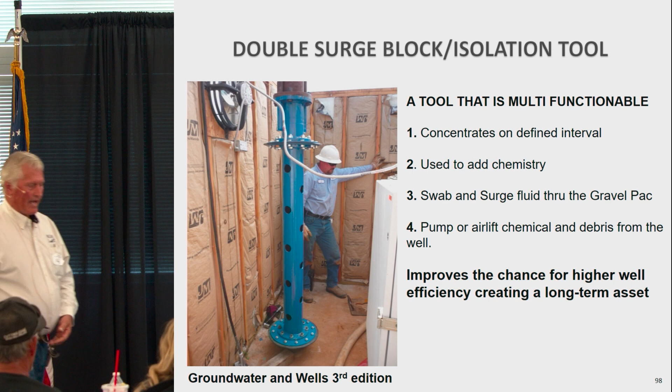But this tool is in there. It's multifunctional. It concentrates on the defined interval because it depends on how far you have your packers separated - this little swab rubber here and this one here. You can go 5 feet, you can go 10 feet, you can go 30 feet. But the closer they are together, the more energy you're going to develop within that zone.

They can be used to add chemistry. You can pump chemistry out into the formation between the swabs. You can swab and surge fluid through the gravel pack. You can go ahead and pump or airlift. You can do either one with this tool.

That electric cable is not attached to this well, but this one was airlifting. You can either airlift or run an electric pump with it. But you should be removing your fines while you're swabbing and surging, and it's going to improve the chances for a good well development.

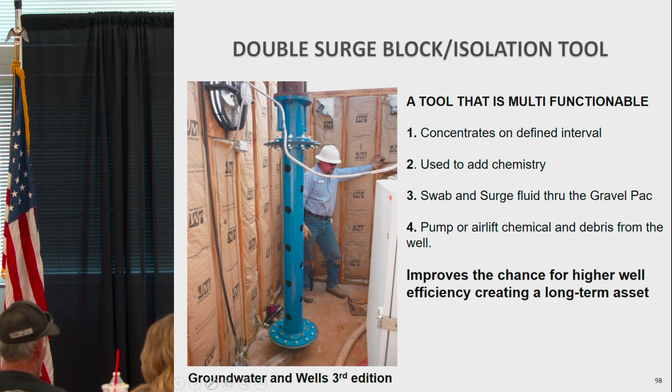This is it again. This picture's in Groundwater and Wells 3rd edition. Basically, it shows how it's built. And again, you can modify it in many different ways, but it's a great tool.

Another requirement to be a long-term asset is your well maintenance. Just like you, just like me, we go to the doctor for a checkup. The doctor tells you what you need to do to stay out of the hospital. We need to do the same thing to the wells, but if we do the best job we can building and constructing that well, we shouldn't have to go back for a checkup like a sick person does. We shouldn't have to go check on it yearly. Now, we can have data collected yearly or monthly or whatever you want, but it shouldn't require you to go out and actually physically do something to that well if everything operates efficiently.

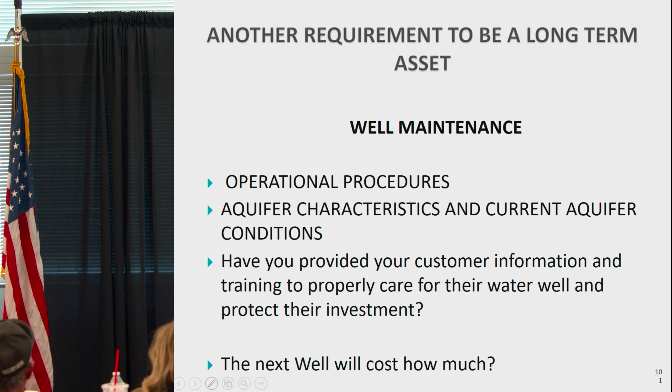We get to look at what it's going to cost for that next well. What's an average house well costing today? 20-something? 30-something? I remember when they were less than 10, okay? Now you're up to 30. What's it going to be 10 years from now?

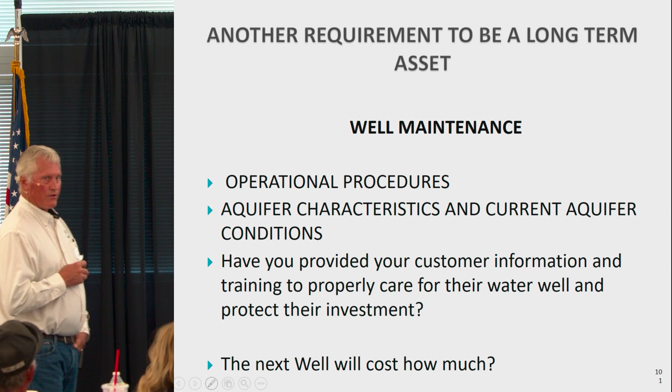You know, we don't know what it's going to cost, and is there going to be room to build another well? Are the rules and regulations going to allow us to put another well in for that landowner or homeowner? We don't know what that's going to be. We don't know what they're going to discover in the next few years, especially with all these emerging contaminants. They may not be able to have another well.

Someone once said groundwater is as pure today as it will ever be, but not as pure as it once was. It doesn't matter who said that, and I don't know who said it. I've had several people in the room raise their hands claiming they said that. It doesn't matter who said it, but that is a very true statement.

Our water is not ever going to be as pure as it is today. All the groundwater, all the water that we're putting back in the ground, even though we're treating it, it's not as good quality as what was already there. It may not have the iron, it may not have some of the constituents in it, but it probably has pharmaceuticals or something else that we can't pull out of it, going back in through our ASR wells.

We need to make certain that as we put water back in, we're doing it responsibly. We also need to do a better job selling the future and not just merely getting by for another day.

So I'd like everybody to step up and be able to say, I am a groundwater professional. I'm going to do the best job I can to preserve our groundwater for future generations. It's not just for your kids' lifespan that you got to worry about, or the grandkids' lifespan. What happens 5 generations, 10 generations from now? Are they going to run out of water?

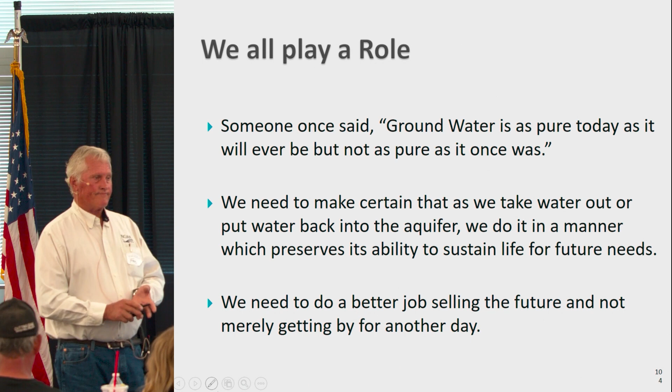I'm praying that these kids coming up through colleges today or even through grade school today are smarter than we were. I pray they're smarter than we were, because they're going to have a hard time figuring out the solutions for all the devastations that we've caused them. And you might not think that you contributed to it, but each and every one of us have in some way contributed to the water quality that we're being left with.

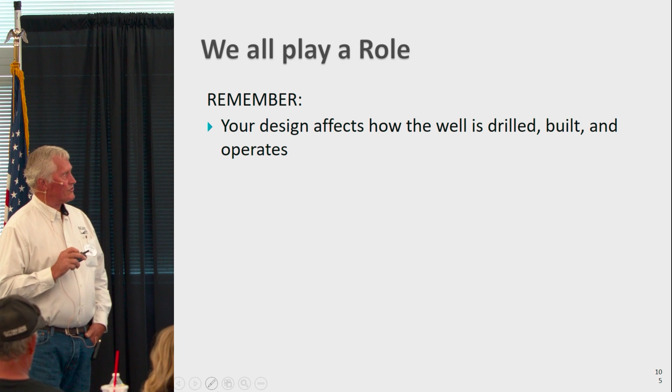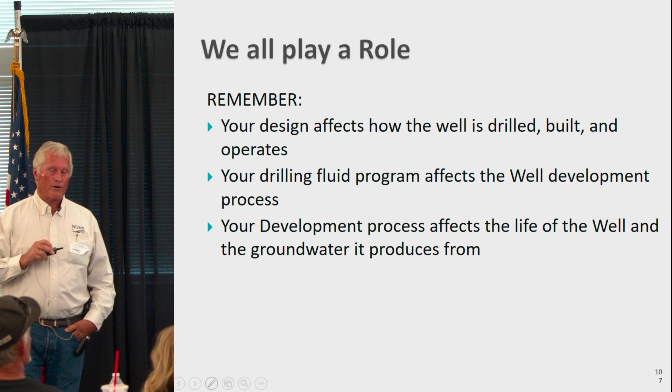Remember, your design affects how the well is drilled, built, and operates. Your drilling fluids program affects the well development process. Your development process affects the life of the well and the groundwater that it produces from. And the health of the water well and the groundwater affects the price of the asset.

So together, all of us working together, working with our regulators, working with our rule makers, working with our groundwater professionals, other groundwater professionals, working with our well owners, we can make a difference. If we all work together, we can make a difference. And that's what I'm hoping that I get you guys to understand today. We need to work together.

We don't look at our other drillers as competitors. We look at them as associates. They got the same goal as you do. They're trying to drill water wells for the need of their customers. You're doing the same thing.

And if you know somebody's doing something wrong, you need to speak up. If they're contaminating the aquifer, if somebody else is contaminating the aquifer, we're contaminating the aquifer. If there's somebody drilling that's an unlicensed well driller and he's doing things wrong, we're doing things wrong because we have a voice. We need to speak up and stop that, because we're allowing somebody to contaminate our groundwater. And we can't sit back and let somebody contaminate it.

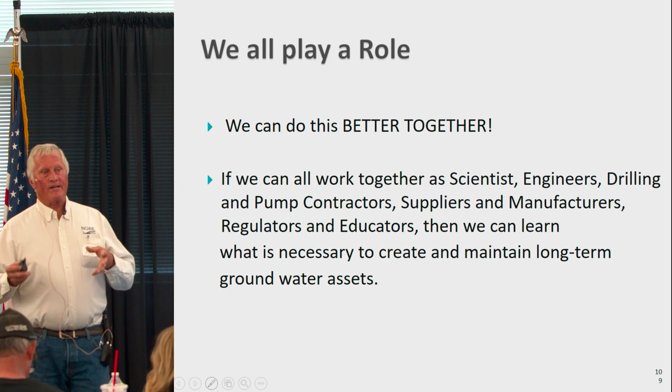That's the conclusion of my talk. And I know I'm just a little bit early. Actually, I'm 30 minutes early, ain't I? So you guys are going to be getting out of here just a little bit early.

No, my grandpa used to be a well digger. And he would dig wells over 100 foot deep, line them wells. And it's like, I try to fathom how he did that. In Oregon, in a lot of places we have a high water table, but he'd be pumping the water out underneath of him so he could keep going deeper and deeper and deeper in them wells. And it's amazing what people, even back then, they had a lot of ingenuity as a well digger. But today, not very many people dig wells.